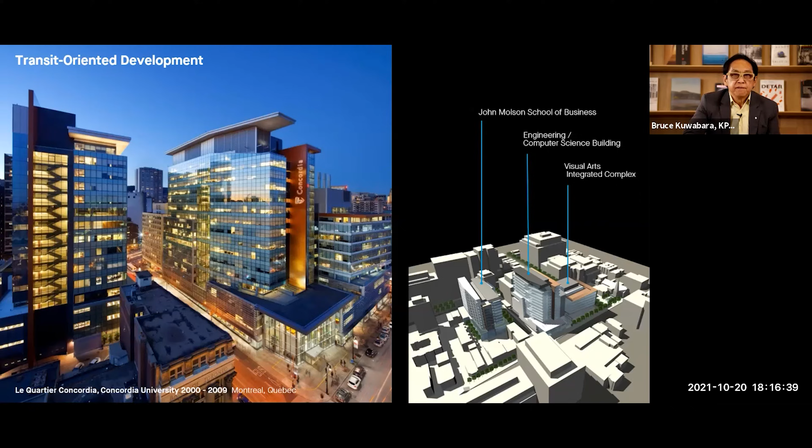Transit-oriented development. We won the competition in Montreal in 2000. It's 1 million square feet with 3 major departments of Concordia University, not one parking space. It's connected into the Montreal metro system, and the campus, like NYU, is totally integrated with the streets of the city. The streets of Montreal are really incredible. So this is really transit-oriented development in our terms, where the interior of the building that takes you to subways is really like almost outdoors, and hence the picnic tables.

Thomas Auer presented to you Manitoba Hydro, and this building is really an exemplar of how to create a passive, very healthy building. I'd say this is the healthiest building that we've designed. It's very relevant in this pandemic because it has 100% fresh air. It has windows that open. It has a geothermal system. It has no recycled air. See the solar chimney, that's the exhaust. In the winter, we gather the air that is in the office work slabs and take it down and heat the garage below.

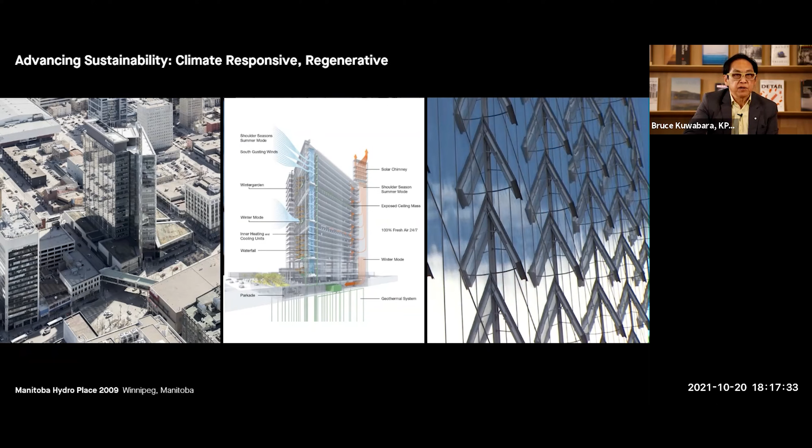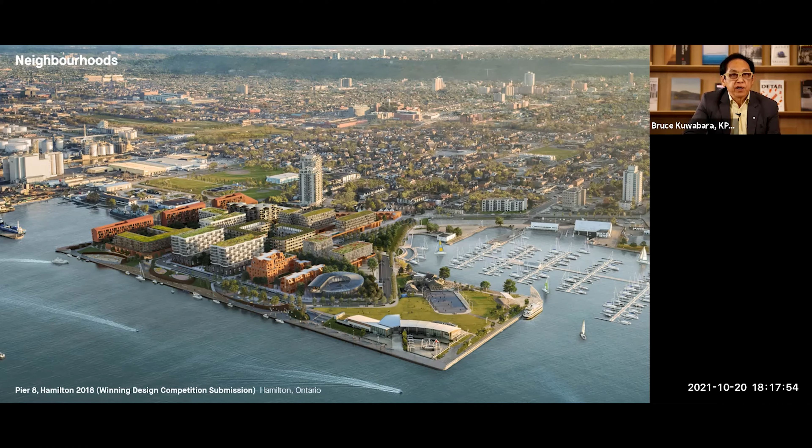And then I'm very interested in this idea of formatting whole neighborhoods of cities. This is in my hometown. We won the competition. We're working with other architects, and it's been fantastic because some of them had worked with us and had set up their own practices. This is ongoing. This is one of the ways in which you can achieve, I think, a kind of coherent diversity, where the expressions are all different, but there is a unifying idea around the public realm.

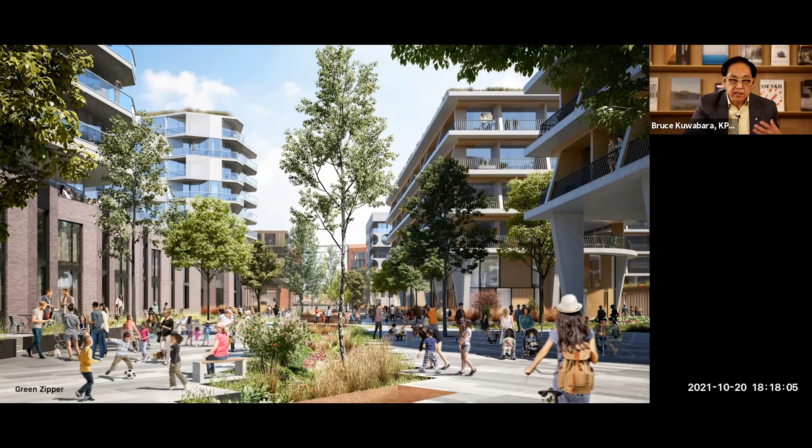Okay, I'm going to present 4 projects. 2 are the most recent vertical campuses that we're working on, and the last 2 are art galleries. But I wanted to give you a sense of the buildings that I think are the most important buildings that I'm working on today. So we won this competition quite a while ago, 5 years ago.

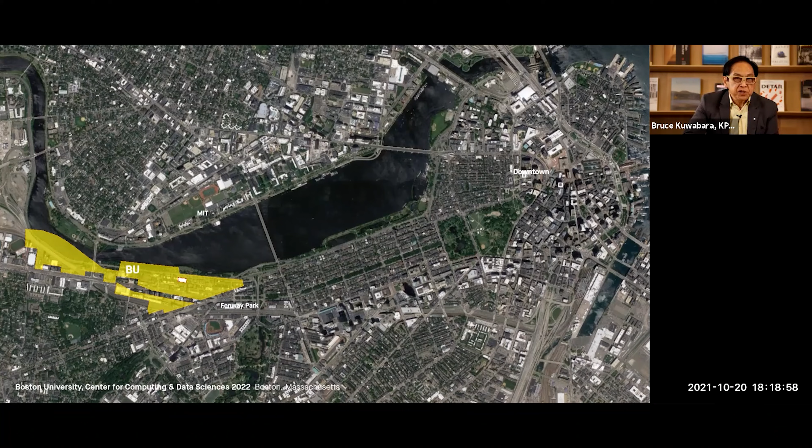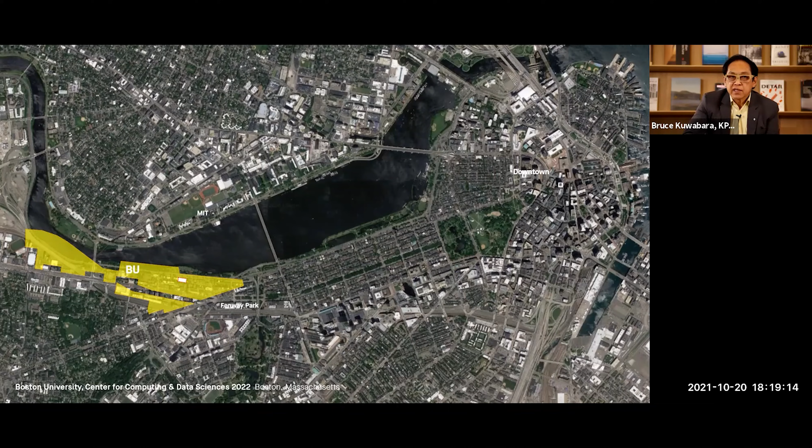It was put on hold, then it came back on. It's for BU, right on Commonwealth Avenue, and it's net zero. BU is a narrow stretch on the Charles River across from Harvard and MIT. Olmsted's great Commonwealth Avenue comes through and becomes not so nice, actually, when it comes through BU. But we're right on the river. And BU's proposition is that data sciences are the tool for problem solving in every discipline of the university, and they created a faculty for data sciences. It's the white rectangle within the long yellow campus color.

Here's our building, an aerial view, and you know, Boston and the Back Bay, it's red brick. The School of Business is the big building on the right, and far to the upper left is Jose Luis Sert's beautiful tower. I liked that when I was a student, and it's now the Faculty of Law. Our building sits between them, and we had to frame an argument for its form, its height in Boston, which, you know, is really quite a conservative place.

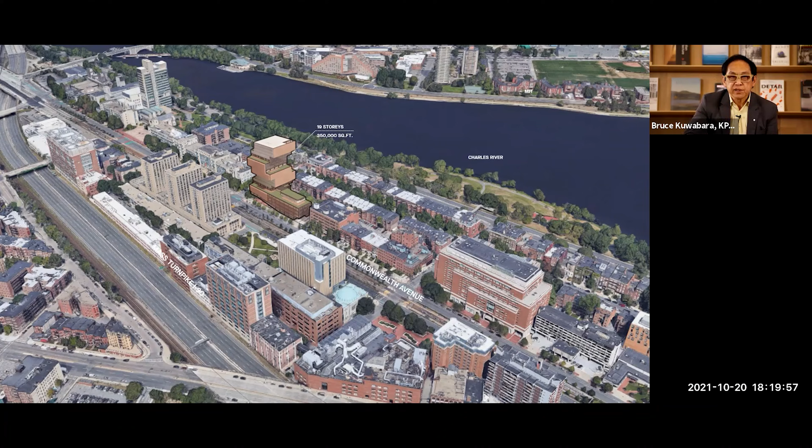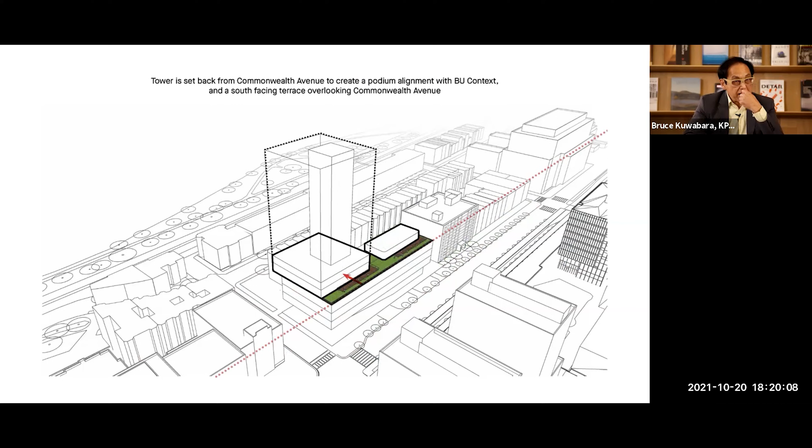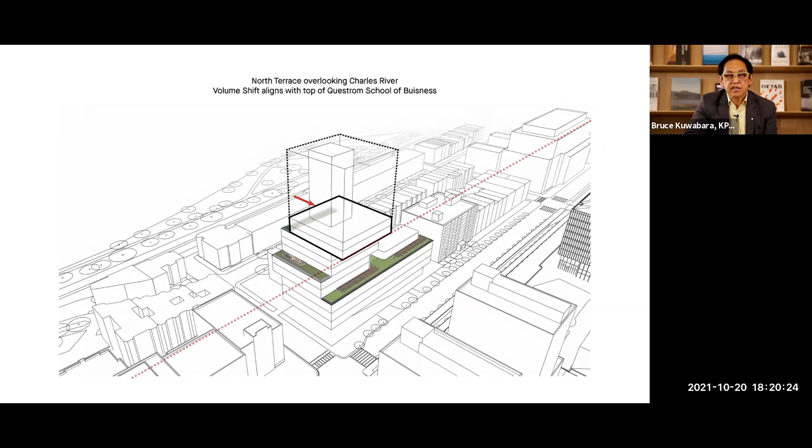But we created a vertical campus, taking all the lessons we had learned, and we wanted to bring Commonwealth Avenue, the sidewalks that are so busy, up into the building. So these are just a series of a concrete core. It's a steel building with a square floor plate that shifts around and takes advantage of the laneway that BU owns, pushes it right onto the corner, creates a series of stacks of 2 and 3 stories, much like traditional campuses. They're lower buildings, but they're stacked, and every shift creates an outdoor space with a different orientation, the image of the building right to the top. And at the very top, there's an outdoor courtyard, and then there's a kind of spiraling of exterior solar shading around the building.

I'll explain that a bit further. The pavilion on the lower roof is all about food and the river.

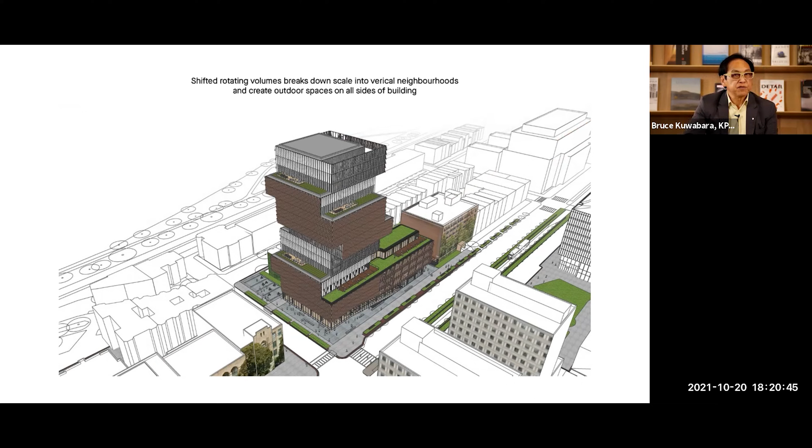Here's the elevation perspective where the ascent on those terraces is an extension of the sidewalk, and it goes up into the lower floors, which are accessible. They're university-wide classrooms, and then you get engineering, mathematics, and up at the very top, the Hariri Institute.

There's an interconnecting stair, top to bottom. It's 18 stories. We don't expect people to walk 18 stories, but we do expect them to walk 1 or 2 floors and not always use the elevators.

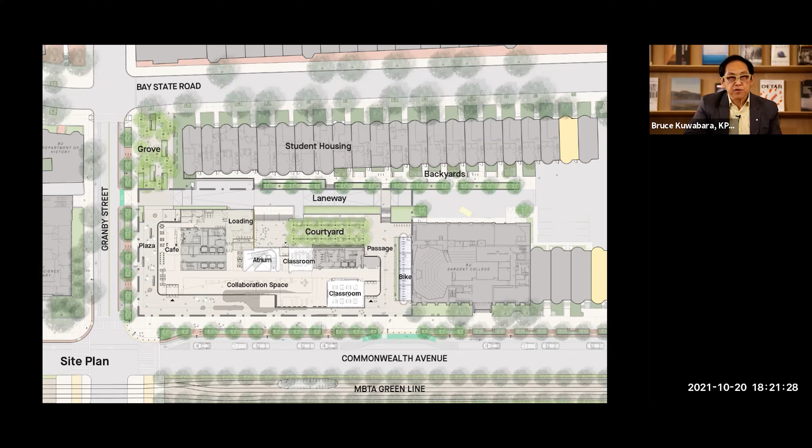You can see how it's carefully knit into the fabric of the laneway, Bay State Road, the existing open spaces. We're trying to create porosity and animation and vibrancy on Commonwealth.

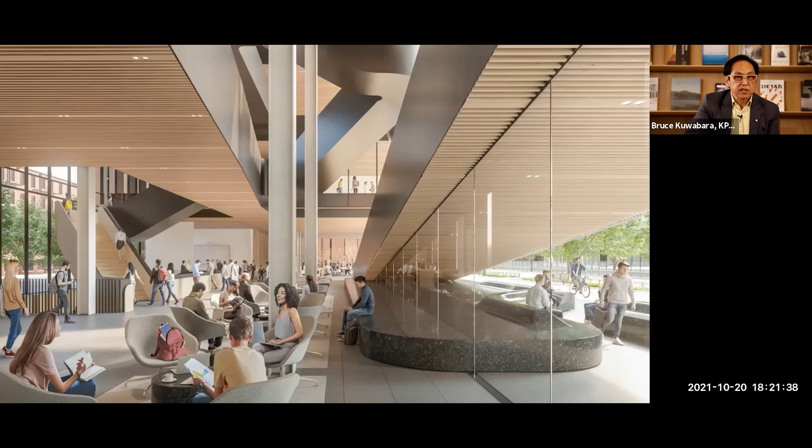A perspective view, this very recent, so you get a stair that is really high traffic for university-wide classrooms. And then up in the tower, we clad the concrete core with white glass that you can write on.

So you're writing on the walls. We want people to be in the public spaces of the building. There's a lot of glass. It's actually very much like our office, actually.

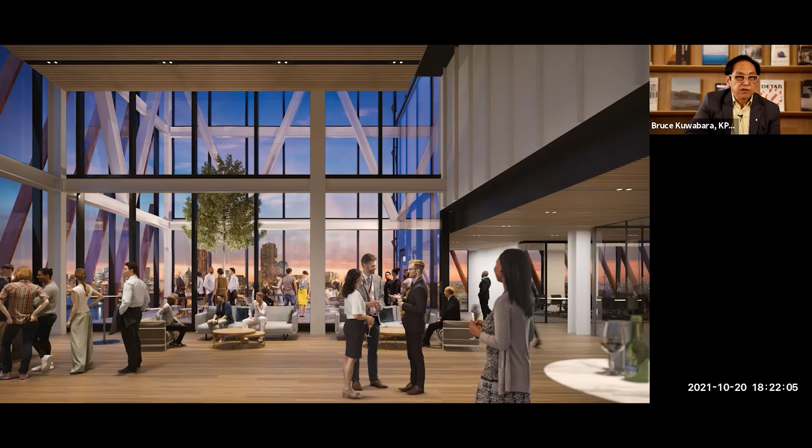And the interconnecting stair goes through at the very top. There's an outdoor roofless courtyard, but the glazing contains it, really to deal with wind.

And just the facade idea, there are 2 conditions: a deeper double bay off of the square core, which is continuous in a single bay.

On the double bay, we worked with Transsolar to develop diagonal louvers that are integrated with the unitized curtain wall system. You're looking at the bottom at the southwest corner. They're angled out, that's why you get this kind of chevron pattern.

When the building is shifted the other way, you only get a single bay. As you see on the right, you just get offices or faculty offices, and we then shift to a vertical system with a very reduced glazing ratio.

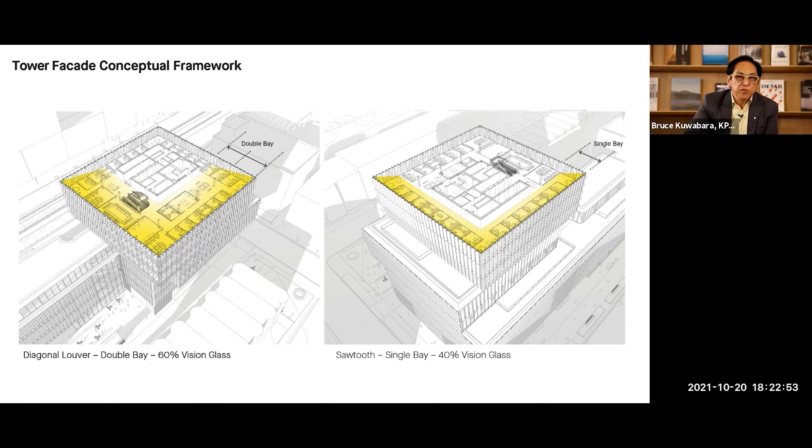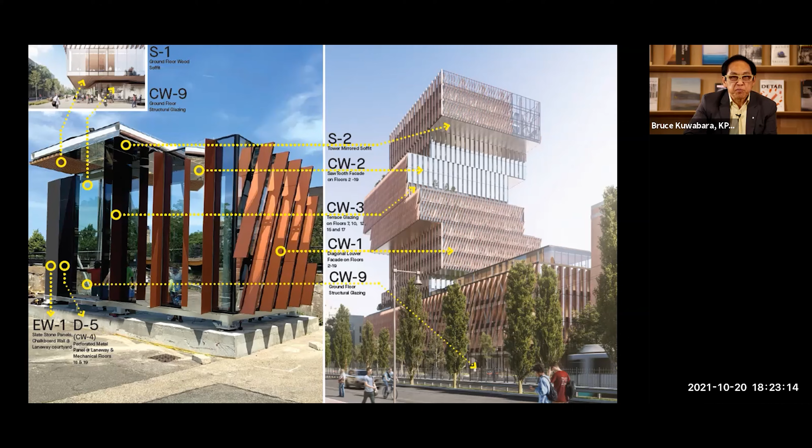And these are the mock-ups. We're really excited about this. You see the diagonals on the left, you get the mirroring of the opaque spandrel pieces, which are on an angle. It's quite active. It's a building that's got some jump to it, but it has an idea with every aspect of it, top to bottom.

Here's from the inside when you see the two systems, and then from the outside.

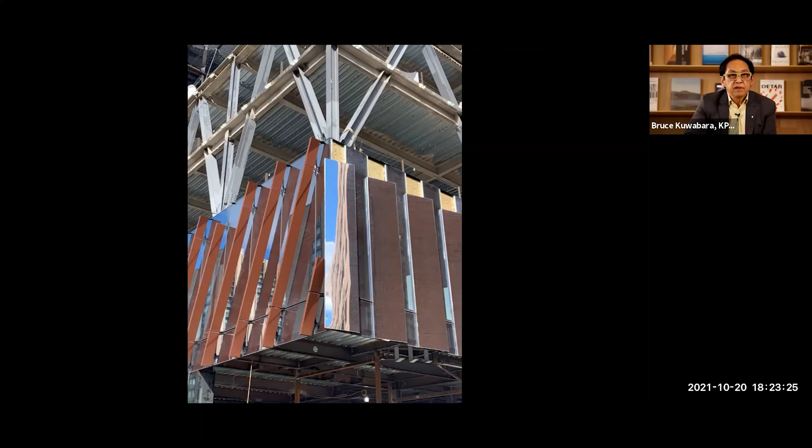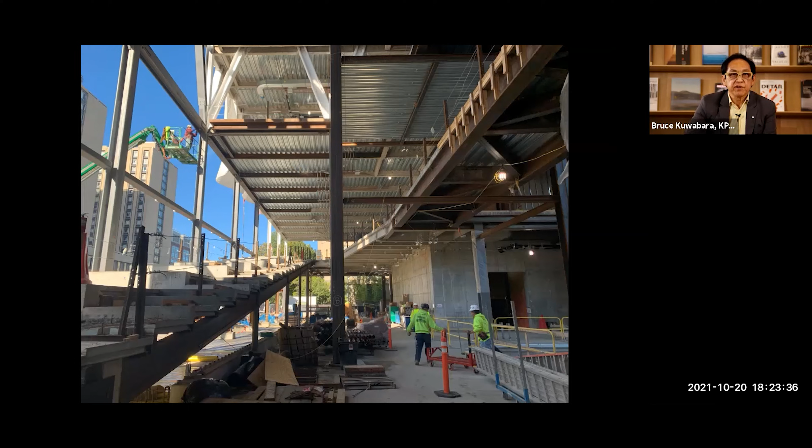And then under construction, the terraces where collaboration will be, and it's right on Commonwealth Avenue. And then this great picture, looking at it, you're seeing temporary structure holding up the steel. It'll then be removed and you'll see the building and its spiraling form.

The building does a lot, but you never get all the way, and then you need an offset. So that's what we're doing.

In the 19th century, it was put as far away from downtown as possible. It was out of sight, out of mind. The asylum was housed in a 19th century building by a very good architect, British, John Howard.

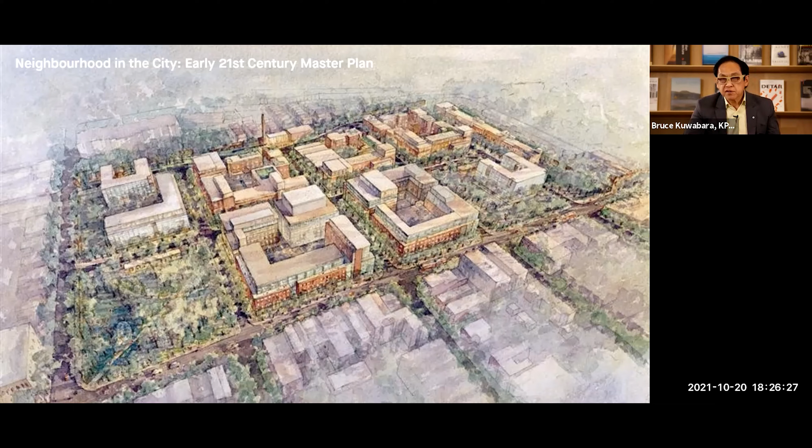There are people who are really having serious issues, and there are others, teenagers, who are just suffering from depression. There's a full spectrum, but the buildings I'm going to show next are the ones we actually designed. We were just trying to make ordinary buildings: residential walk-up apartment buildings and a flexible buff brick office building, community building. Queen Street's up at the far right there. It sort of set the tone of trying to, quote, remove the stigma of the large institution.

And then we finally, after many years, many phases of building out the other blocks with other architects, we were competing for the site that's on the bottom right of the site plan. The site plan was pulling the streets of the city, you can see them up at the north, through the site. Very Jane Jacobs, city of small blocks.

The big changer, the game changer, will be in the bottom left. There's a transit station that goes right into the central rail station of Toronto. And that will, I think, change the nature of how people come to work, how patients and clients arrive, and certainly connect CAMH's campus to the residential neighbors to the south.

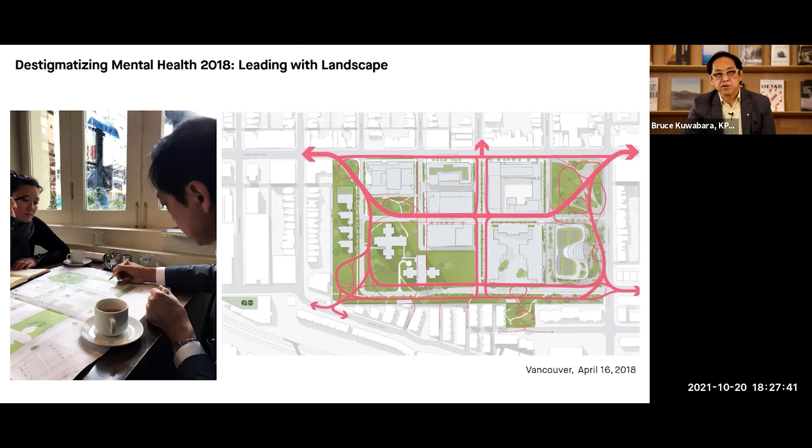So you can see over on the left, I'm working with Jennifer Nagai, a very talented landscape architect from Vancouver. And we were looking at flow.

These are a series of sketches I did in the competition, which had to do with opening the wall, relating the new building to the wall, being able to see over the wall, behind the wall, and really beginning to think of massing. This is a very large building, about 400,000 square feet. But the fundamental move was to try to get light into the garden that would exist between the wall and the building, so there's a kind of compression being made to squeeze the plan.

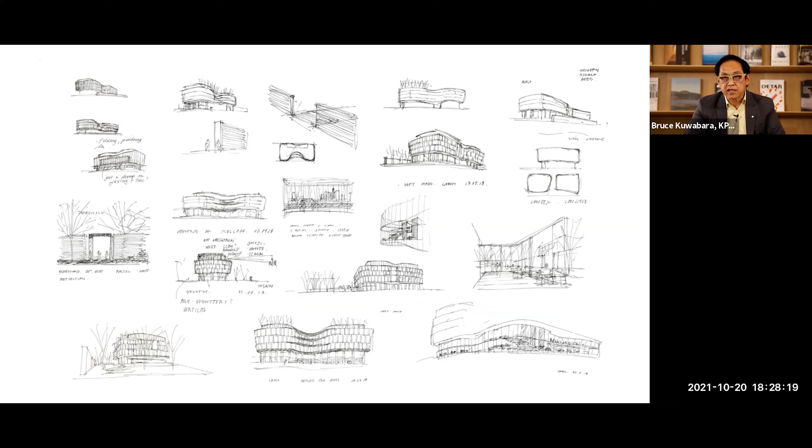It's a 50,000 square foot floor plate, so it's huge. And there are some labs in it.

This was a summary diagram of below grade, a concrete building, two stories. This were all medical testing, food. There's an auditorium. Sanctuary is a hybrid steel and timber building. And up top is a roof terrace and event space. They call it the Beacon.

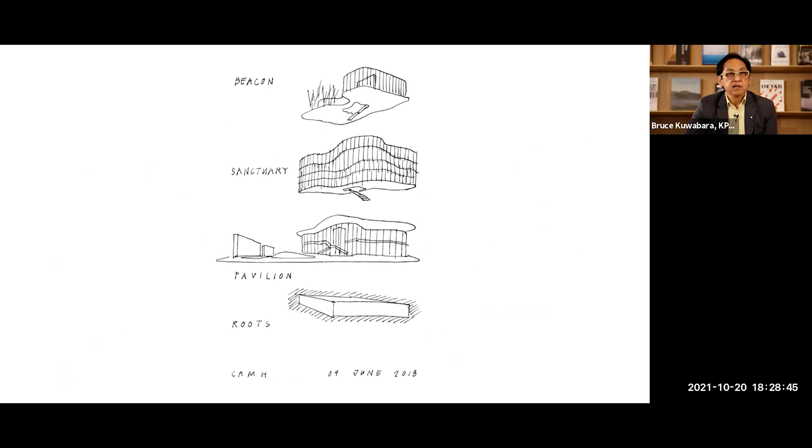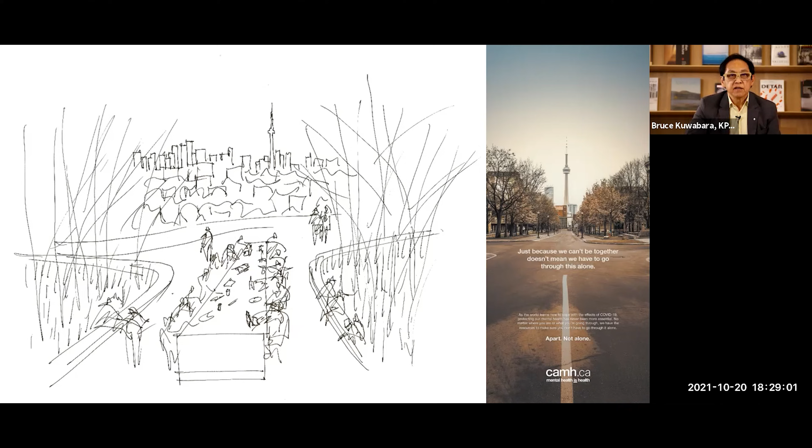And then a sketch I did of connecting this building above the wall to the CN Tower. And on the right, CAMH has really upped their game in terms of communicating and changing public attitudes about mental health, and frankly, it's about time. There's a big change going on. Donors would never give money to mental health projects, and they are now, because I think it's accelerated in the pandemic.

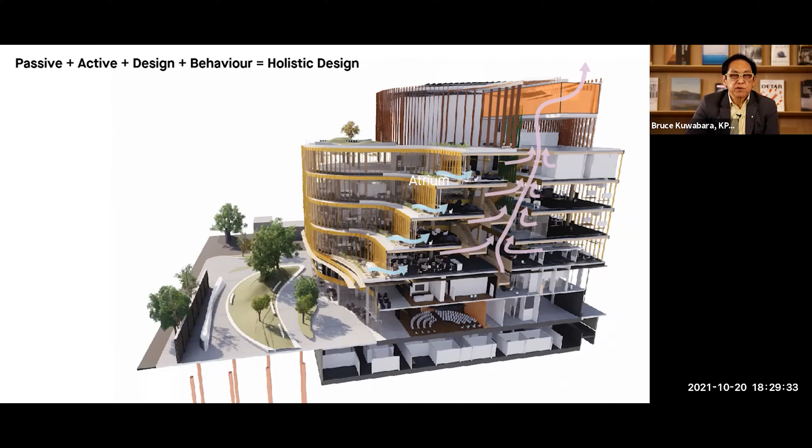These are the four ways in which you can really think about holistic design. Transsolar would say, think about your building as though it had no mechanical systems. Then you apply active systems very carefully. It's really about the culture of design. You need design teams that want to make buildings that are sustainable, and then it's behavior. At Princeton, we realized that you could make a 28% energy reduction just by the behavior of students and faculty. And then this became a metaphor.

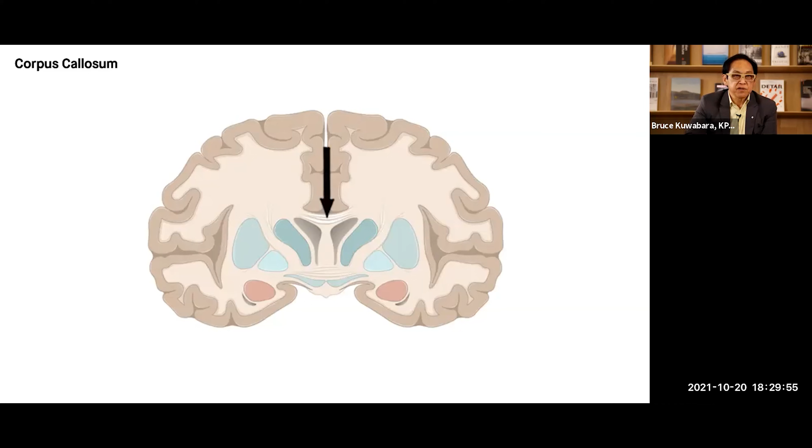This is not where we started, but after we started giving shape to it, someone said, you know, this is really interesting. The collaboration spaces are like the corpus callosum, and it really is about all of the nerve endings that allow the hemispheres to actually connect, to make your brain function.

What Milton was talking about, this is the most important thing for me, which is 100% fresh air, a building that breathes, windows that open. It has the outer skin of Manitoba Hydro. You can see it has underfloor displacement ventilation. We aren't pushing the air from above down. In a pandemic, you would never do that. We would just let the flow through, but it's 24/7, 365 days of the year, lots of natural light, wood interiors.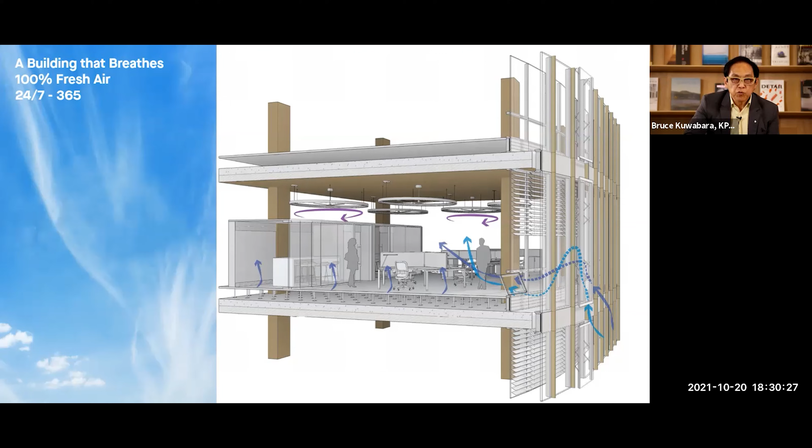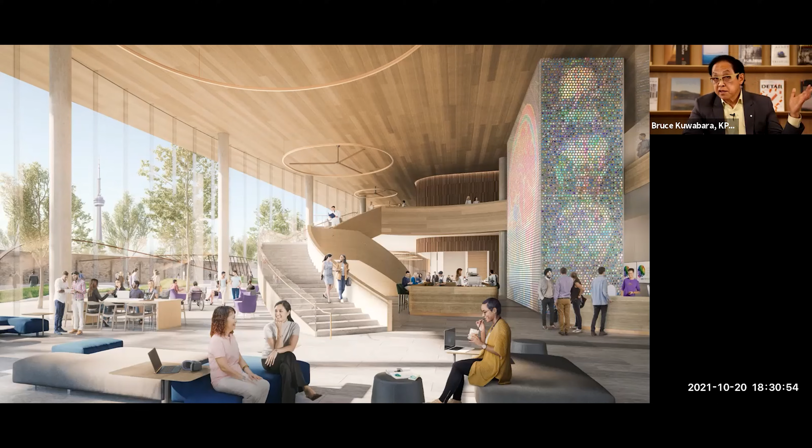Inside on the ground floor, even though Toronto's building so much, you actually have a line of sight to the tower, that sense of connection to the downtown, and then a very open public hall, which is connected to the garden, to the backside of the wall. But in the middle of the building, this is where everything comes together. People, the cascading, another scissors there.

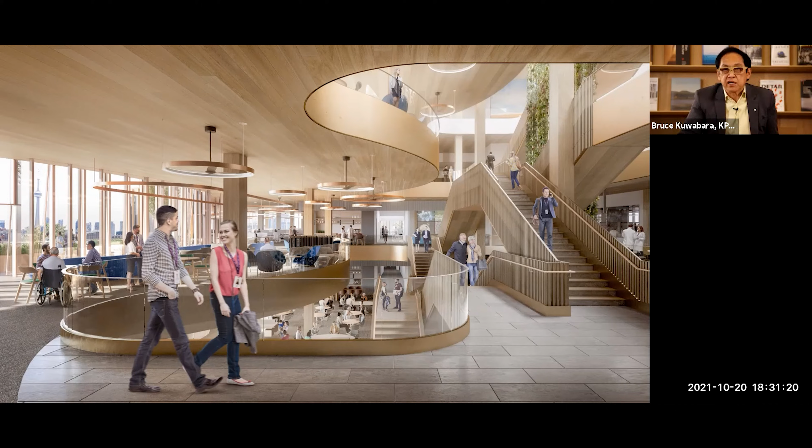I got to tell you, Milton, that I actually stole that from Rafael Moneo at the Davis Gallery at Wellesley, which we toured when I was doing a visiting instructor's role at the GSD. But I saw in this potential to organize movement and the exhaust system and bring in light and bring people together in a large floor plate. And it's essentially a grid, and the curvature is only on the perimeter and just a view.

Okay, those were the two vertical campuses. And now we're going to have two art galleries. One that was done and opened in 2017, Remai Modern. It's in Saskatchewan, Saskatoon. I've discovered the country through our projects, and it's fantastic to actually adjust your work to different climates and to different cultures and communities. So they said it had to be a winter haven. They said it should be a community living room and a hub. And then it's become an open field for indigenization.

You know, Yann Martel wrote the book Life of Pi, and he lives in Saskatoon, and he wrote this, and we found this image. And for me, it was really about, the building is not nature itself. It's inspired by nature, but it's actually inspired by some proto-modern buildings like grain storage and just very geometric things that stand against nature, but are integrated.

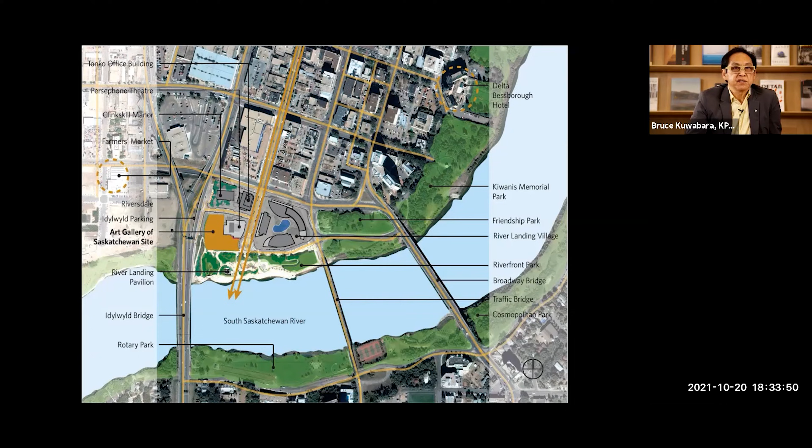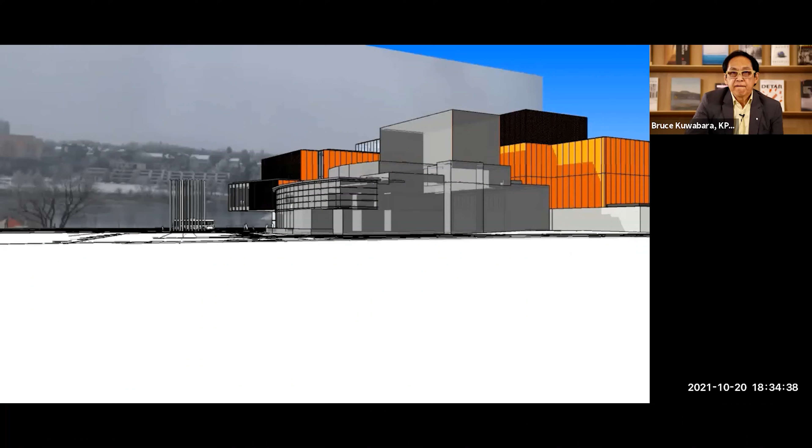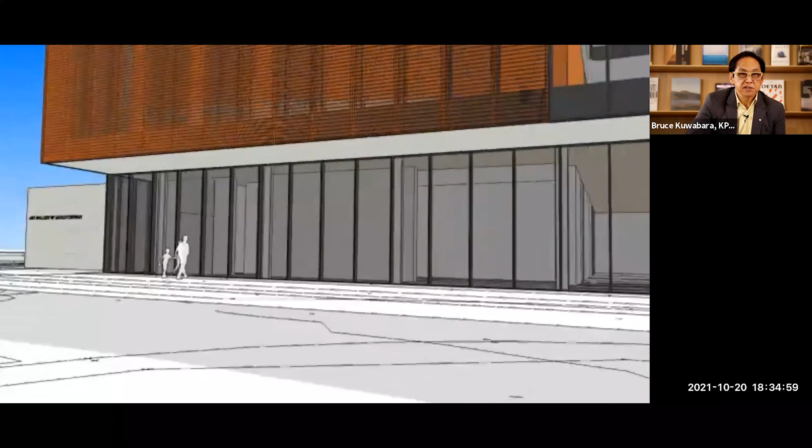This is a very quick video study, but I thought it was worth showing. It has a kind of rawness to it that I really like, and our clients got really excited about this. And so it doesn't all have to be super finished and rendered. It has to be spatial, and it has to really convey the ideas of the project. We did a double cantilever on the corner, really presenting the building to the freeway. And that's because there were municipal services below ground and we had to pull our building back. And so we cantilevered to regain the space.

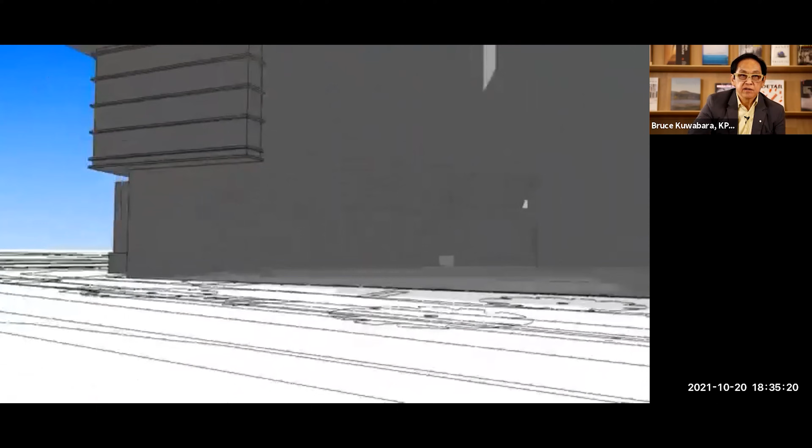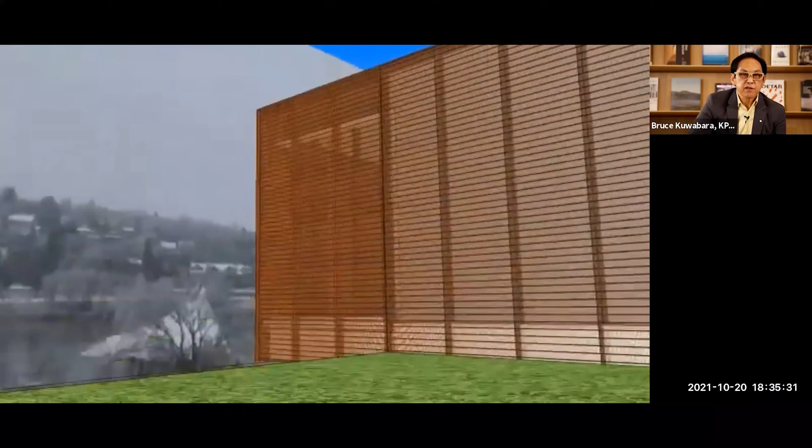These are the service areas. There's the back of the Persephone Theatre. We're coming around again, looking due south. You know, the entrance pavilion is raised. You can drive a bus under there. That's how lots of visitors will be coming. And then there's a series of outdoor terraces overlooking the university and the South Saskatchewan River. You'll see some yoga happening on this roof in its built completion. That's the boardroom that gives out to that terrace.

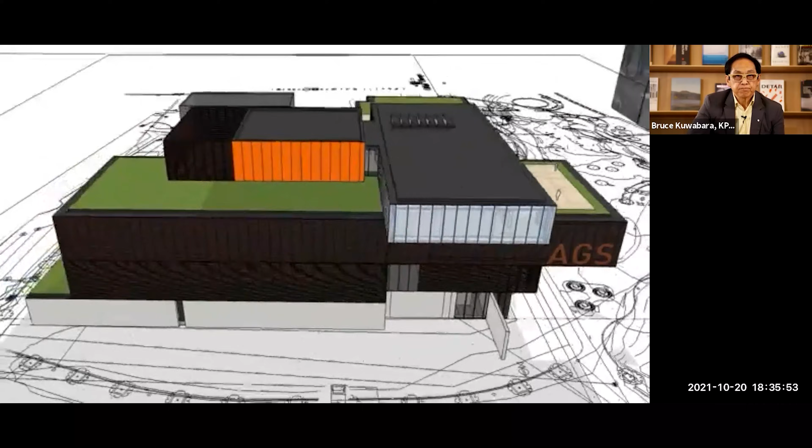There's a 30-foot cantilever projecting right out over the park. All the offices are up at the uppermost level and it's slightly reflective. And some days it just disappears entirely. That's the multi-purpose room where people are standing on the second floor.

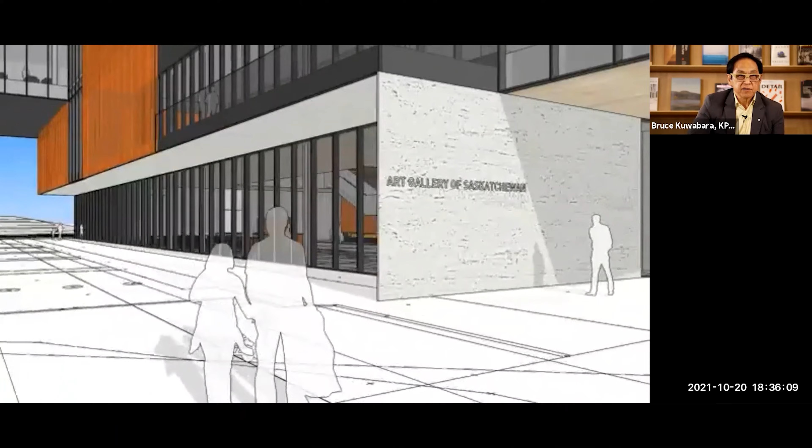And the rust colored became much more copper colored. It's an expanded steel plate. It's really for solar shading. We want our cake and eat it too. We want the view of the river, but we want to protect the building from solar gains.

So here's the building complete. You see the Idylwyld Bridge on the left. You see park pavilions we didn't design. You see buildings in the downtown, but our building is the front face of the downtown of, I think it has like 275,000 people. On the right, there's riverside walkways. People go there, jog, and we wanted a building that would be inviting to everyone. And at night in the winter, and it gets really cold there, that's when the building has to become the winter haven.

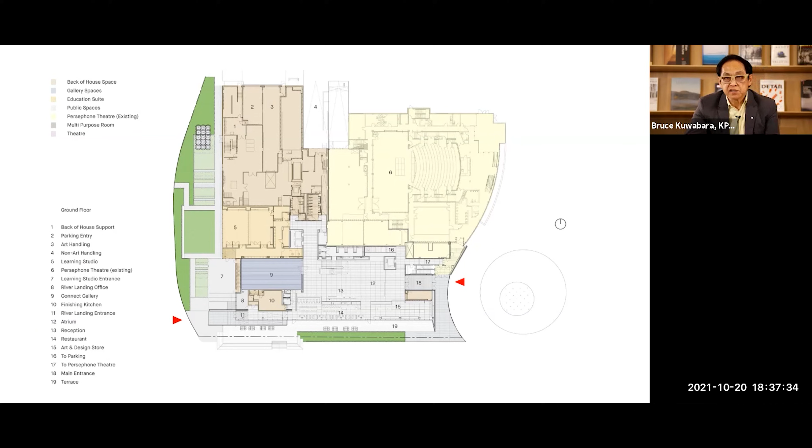Here's the rooftop that I was showing you before, overlooking the university. And then we even engaged the existing stairs that the city had designed to the front entrance where the bus drop-off was. But there are 2 entrances to this building. This is one, and you see the other one on the far left. So one of our strategies was that if you're there, you've never been in a gallery, you might come in for a coffee and find yourself in the gallery, in the cafe, and walk right through the building. But you may have that moment of friction and engagement. The blue Gallery 9 is where you'll see one of the installations. It's right on axis with the main entrance.

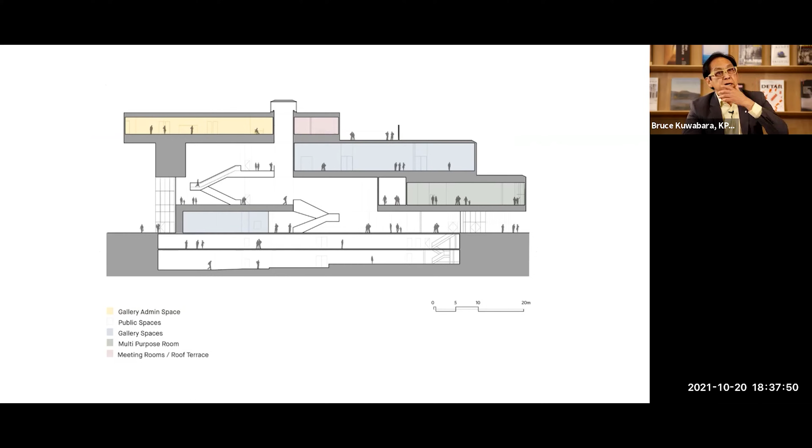Here's the section which was not preconceived, it was kind of carved out of the stacked bars, but to try to create an architectural promenade and light from the top. It's also our exhaust. And then some beautiful integrated art. Haegue Yang is a tremendous artist who uses Venetian blinds and really created a much more intimate center for the stair, the fireplace. And that fireplace is really used. So you get an indigenous artist, Lyndon Linklater, hosting fireside chats, and they're very popular. They've drawn a whole other community into the gallery.

And then in that Gallery 9 that I was saying, right on axis with the main entrance, when the building opened, Thomas Hirschhorn really made a commitment and basically did a long-term project at the gallery on the ground floor. And it was titled, "What Can I Learn from You? What Can You Learn from Me?" And there were people who had never been in an art gallery. There were all kinds of people who came in, and he basically had conversations daily for 6 weeks. And then another installation that I love, Pae White, she dissolved our stair from the 2nd to the 3rd floor, and I hope it's permanent because it's so fantastic.

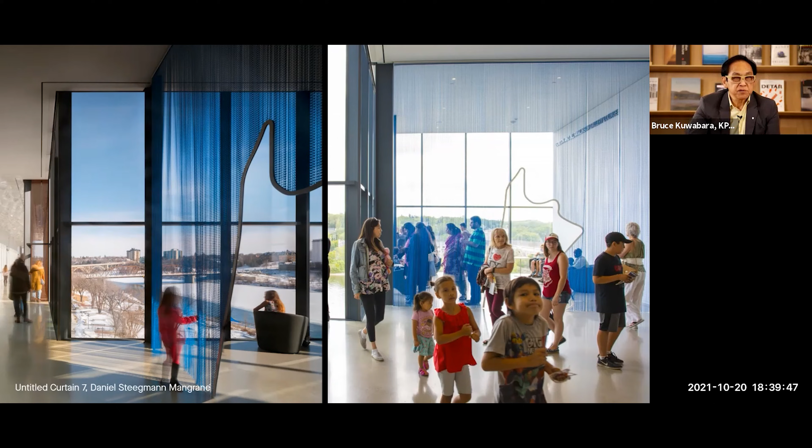Recently, this is part of using the building entirely for indigeneity, that there was going to be a special gallery. And that's the last thing Indigenous artists want. They just want to exhibit their work. And I love this term, Postcommodity. They're American and they're collective, and they really are raising the issue of water. There are many Indigenous communities that do not have drinkable water, and it's a shame.

Okay, in Canada, the Truth and Reconciliation Commission was active from 2008 to 2015, and it was organized by the parties of the Indian Residential School Settlement Agreement. And the commission was tasked with documenting the history and lasting impacts of the Canadian Indian residential school system on Indigenous students and their families. There were 94 calls to action regarding reconciliation between Canadians and Indigenous peoples, and we have lots of work to do.

If you've been catching any news from Canada, because it's been almost every day, there are over 1,000 unmarked graves of Indigenous children that have been discovered at residential schools in British Columbia and Saskatchewan. And Murray Sinclair, who was a senator in our government and who chaired the Truth and Reconciliation Commission, actually thinks the estimate is closer to 10,000.

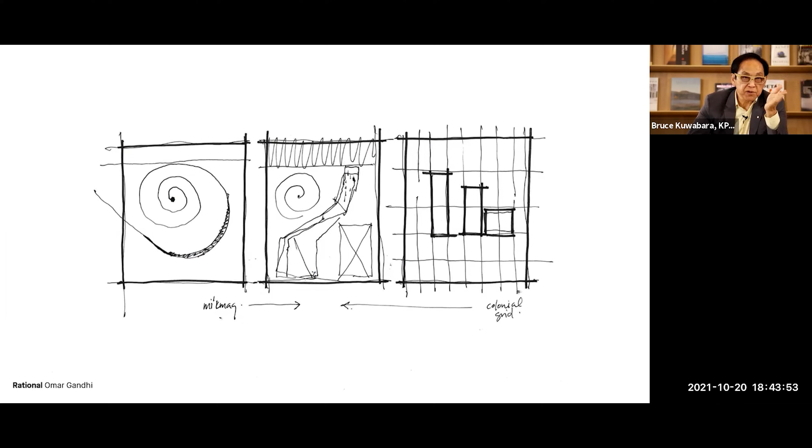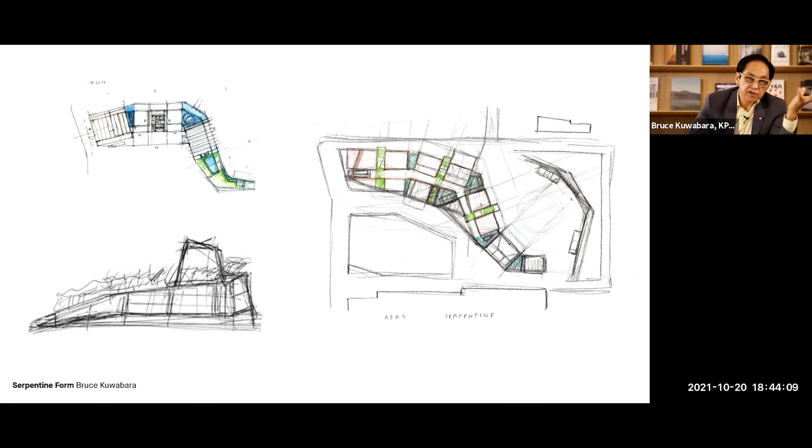These are three diagrams from when we were at an impasse. You have the colonial grid on the right. You have a spiral that Jordan Bennett drew as an artist about a gathering place. And then I was trying to resolve things with a kind of serpentine. I sketched these, which were really about three buildings, three pavilions, four, five graduated, making a kind of serpentine that would cup the exterior space and also connect with Lower Water Street on the left.

And then Mark did this rather incredible drawing where he said that the building should be on the left, there should be an oculus, and then the tail of it should extend into the water. You'll see some incredible drawings that he did. We may not get that extension into the water, even though people loved it.

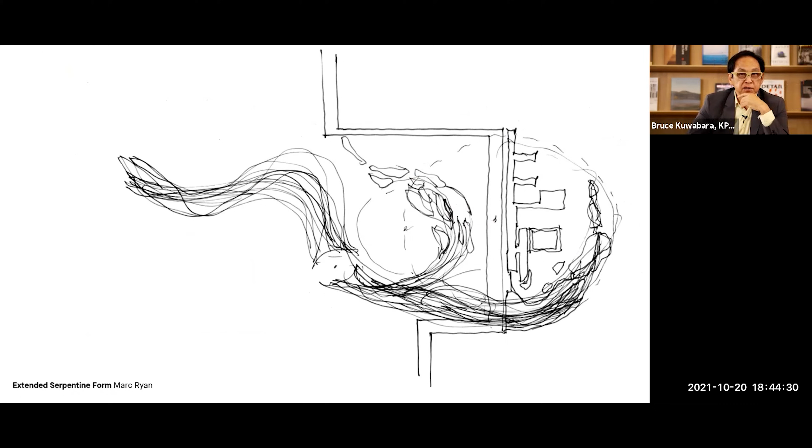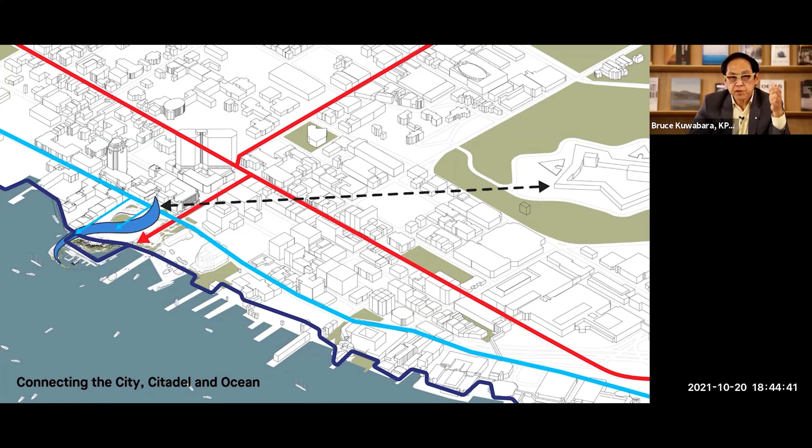But here it is. It's the serpentine cupping two spaces, a way of addressing the Citadel, but also the water, connecting the city and the water, creating something that's very sustainable, very, very flexible. And the form of the building, I don't know if I can even describe it. The pavilions are there. There's this tall central one. We're changing that actually now.

There's a notion of the serpentine in the elevation of the building. It's very challenging to make a reference, but also to keep it abstract enough that it's open to interpretation. There's rising sea levels that we have to manage. This is a snapshot of how the building is organized. I like typologies of buildings, and this is really about an outward look to the water. It's asymmetrical. There's a kind of back of house, front of house, and it's got great terraces on the water.

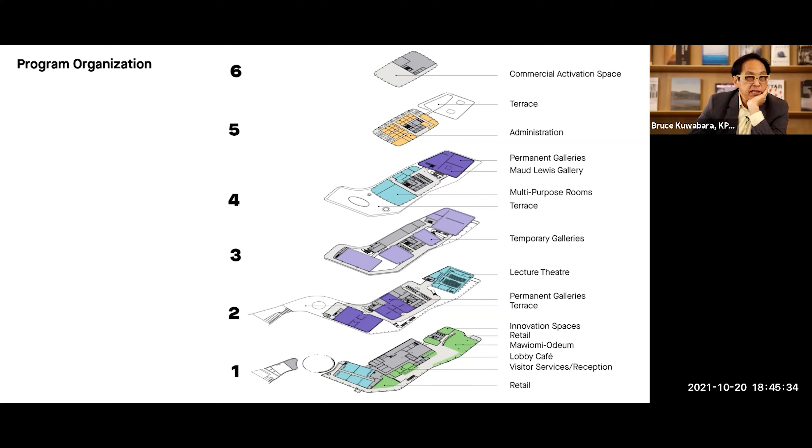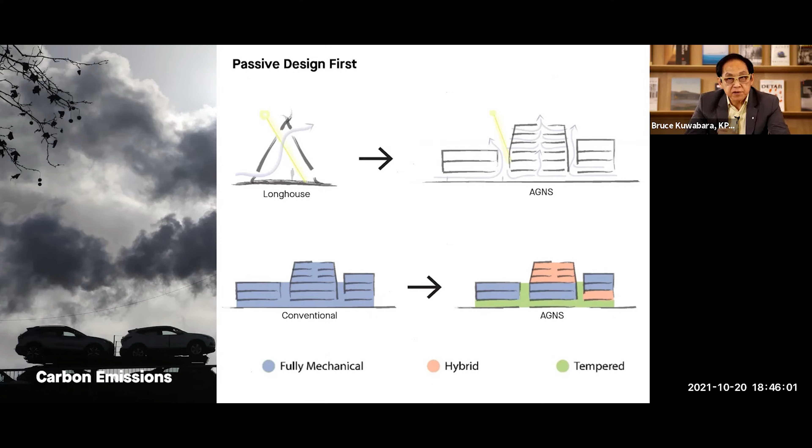This is Transsolar's view, really kind of brilliant, that to be passive, you should only condition the spaces that really need to be conditioned, like the galleries for environmental control. But everywhere else, you see the top right diagram, would be naturally ventilated. And we're arguing for it. It's not easy to persuade people who've only built hermetic buildings to all of a sudden have a natural building. But I think we're starting to win the argument. The pandemic is helping us.

And our filmmaker is really an extraordinary up-and-coming filmmaker who's very much interested in issues of mental health. We made this for you. We dreamt of a place for us.

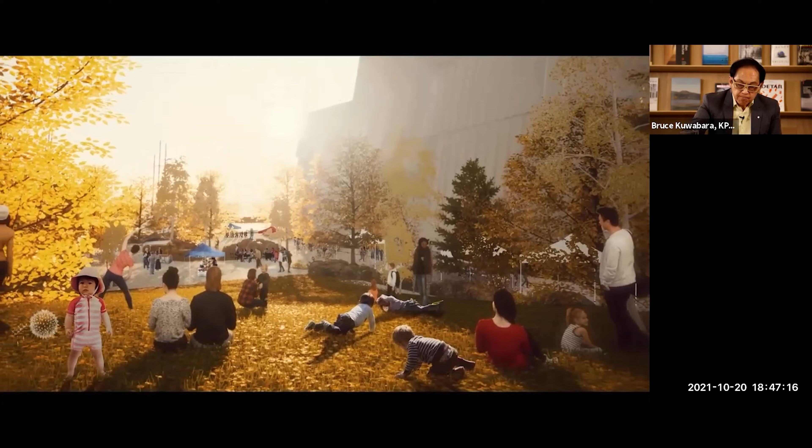A place dreamt by an unlikely group of people who became friends in the process, made up of generational mentors and leaders in their respective communities. It happened at a tipping point in our world, a time that pushed back and demanded change, a new way forward, a new way of thinking. I want to tell you about a place. It's a place for us, all of us, Msit No'kmaq, for all my relations.

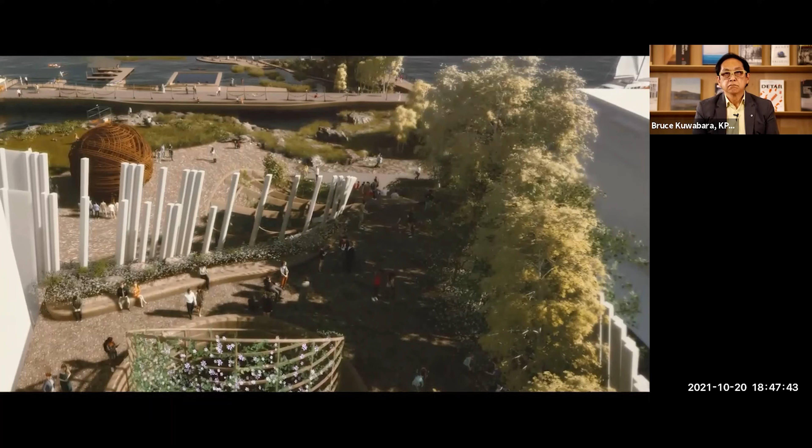Listening to the teachings and directions of the original caretakers of this place, now known as Halifax, the Mi'kmaq. Myself, Jordan Bennett, with the guidance of grandmother white sea turtle, Lorraine Whitman, and Mi'kmaq elders have shared ancestral teachings and knowledge with our integrated design team. This place was built on a group of concepts, elements, understandings, and connections rooted in Mi'kmaq ways of being and knowing. Netukulimk, the Mi'kmaq concept of sustainability and respect for all living things, helps shape and foster the core values

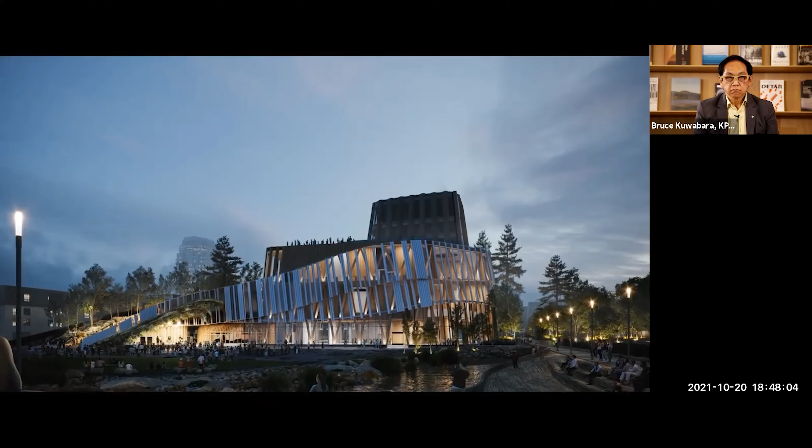inside and out. The gallery's form, inspired by the body of Godao, or eel, forms the exterior and interior of the space, emerging from and entering into Kjipuktuk, the Great Harbor. With its canted grayish-blue terracotta skin, reflecting, shining, and aiding in regulating the space, the eel form exemplifies Netukulimk. The eel is a measure of the health of its environment, and has always been significant to the culture, knowledge, and sustainable practices of the Mi'kmaq.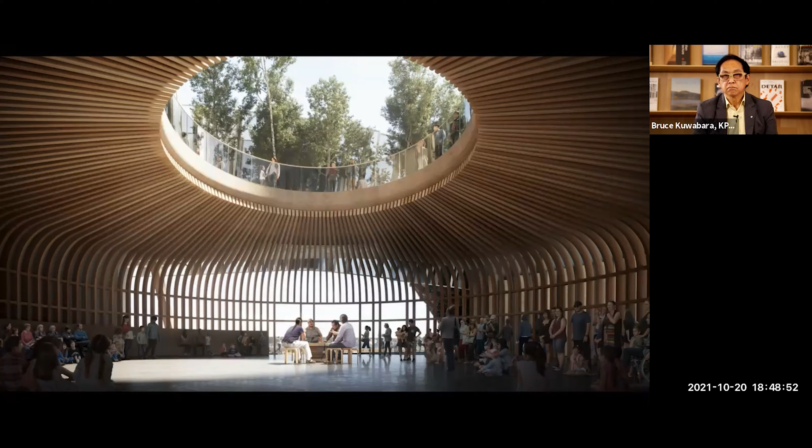The form allows the building to beautifully flow without colonial constraints, and seamlessly open to a landscape inspired by the coastline and ocean, a regenerative landscape that engages Kjipuktuk, a place where people learn, explore, and play, where innovative art, artists, and community are central and ever present. This place is a place to visit, a place where Mawiomis happen. Mawiomis, or gatherings, are integral to the design, a design that continues to bring people together to experience great art rooted in history that is provocative, challenging, and engaging.

To honor our matriarchs, a peaked hat form welcomes visitors at the entrance of the building, a symbol of the strength, wisdom, love, and power that our women hold within our communities. Waliok, we created this for you, always with you in mind. We created this for you, a place where art, language, love, gasalu, and all things are not separate, but one in the same spirit. Msit No'kmaq. Thank you.